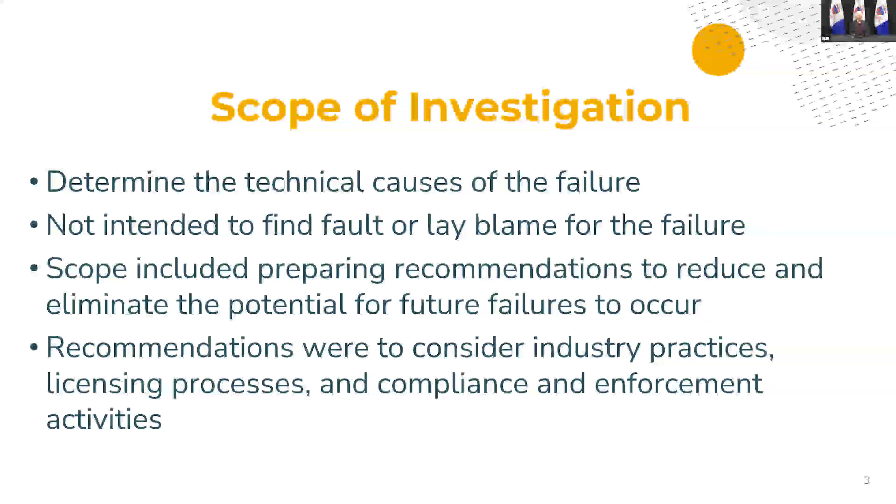So the investigative report was very hands-on. We started with a site visit, and I actually went to the site before the IRB was formed, and then most of the rest of the members went in the middle of September sometime. We had quite a bit of interaction with the library of documents held in the public record, as well as held by Victoria Gold Corp.

There was a lot of back and forth with the receiver, and the receiver manages, I'm not sure if manage is the right word, but they control the operations of Victoria Gold now, and there was a lot of interaction one-on-one with current Victoria Gold people, in part in finding the right kinds of documents. The operation's been around for a number of years, and so there's a mountain of documents, so going through those and finding the right ones to look at took some real effort on everybody's part.

We also had some meetings with the geotechnical engineers that are currently working on the project, both for the Yukon government and for the receiver as part of the remediation. And we had interviews with both current and former VGC employees. Next slide.

We also, through the receiver and through VGC current employees, obtained samples of different ore types, including the ore that we ultimately believe is at the root of the failure. We also got liner samples to test the liner behavior, especially after some of it had been exposed to the weather. We engaged our own independent engineering companies to work for us. They were contracted through the receiver, but they worked exclusively at our direction, so we had technical control over their work. And you'll see their work product throughout our report and predominantly in the appendices.

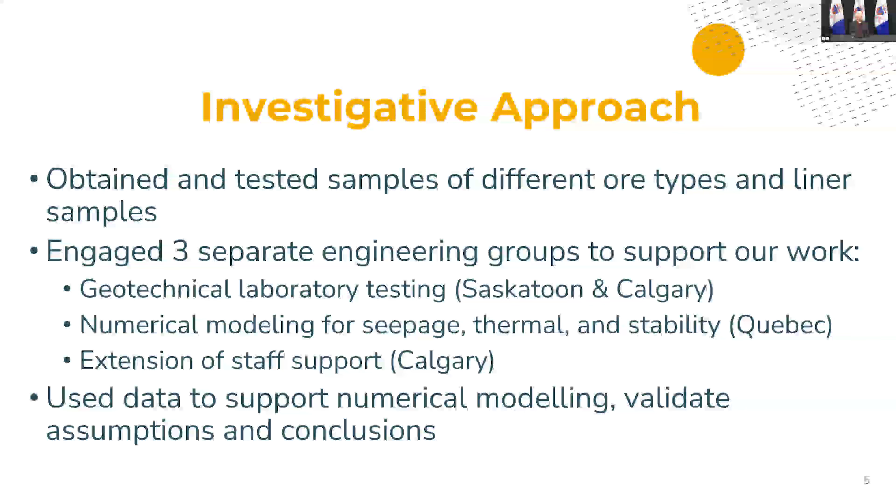The study started pretty early, though, in understanding the specific nature of this failure. This is unquestionably a liquefaction flow slide. It's a word I should know how to say since I've written it so many times. Liquefaction is a very specific set of geomechanical and hydrogeologic behaviors that have a history of causing the most catastrophic failures in all of geotechnical engineering, and mass landslides is one of the most common outcomes of that. There's some amazing building failures that have happened because of this as well.

And that this was a liquefaction was quite clear from day one, from when I flew over the site in a helicopter in early July. It was crystal clear that was the mode of failure. That was the unanimous conclusion of the 6 of us from the very early days. So we never had to really ponder whether that was the failure or not. Now, that was important in part because liquefaction has very specific requirements to occur. And those are 2 pre-existing conditions that we call contractive material, in this case, crushed ore, and saturated conditions.

In addition to those 2 conditions having to exist, you need a trigger mechanism. All heap leach facilities have some contractive ore in them, and all heap leach facilities have some saturated ore in them. So that those 2 conditions likely existed in the heap was pretty clear. We did verify that beyond any doubt. In fact, we know with some specificity where those occurred in the heap.

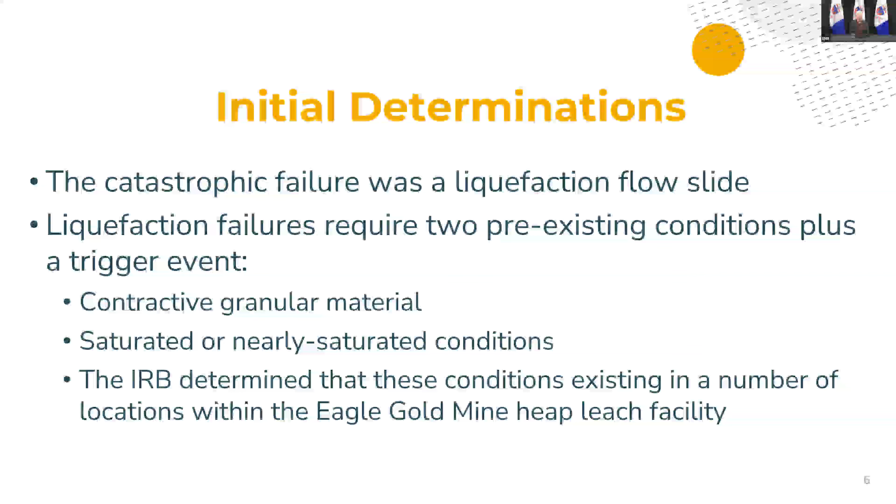So the third thing you need for liquefaction is a trigger. So our search early on focused on finding the trigger event. Next slide. The most common trigger for liquefaction failures, and the ones that tend to make the press and textbooks, are earthquake-induced liquefaction. We were able to rule out earthquakes early on because the seismic record for this part of the world is quite thorough, and there was no earthquake activity anywhere near the right timing or the right location to trigger this event. That parallels the study by another group who came to exactly the same conclusion.

So that allowed us to focus on what's called static liquefaction, and that's loading by anything other than earthquake in essence. It's a little more complicated than that, but that's what it boils down to. The classic loading for static liquefaction is rapidly raising the elevation of something, like in this case, the heap. We actually see that fairly commonly in tailings dam failures for a certain class of tailings dam construction. The 2 big failures that happened in Brazil both had static liquefaction at their root, because you raise the dam too fast, or you change the water level behind the dam too fast. So in this case, we looked at the rate of the rise of the heap, and we ruled that out. It was too slow and too far away to be a plausible trigger.

The next most common trigger is unloading the toe or some part of the lower slope. And you see that on highway slopes occasionally where some construction activity will undermine the slope, and then next day that slope will release and have buried the road. That's a local static liquefaction caused by undermining the toe of the slope. So we looked at that as well. And then we also looked at the water levels inside the heap. Now this heap had very little monitoring data, so we didn't have direct readings of monitoring wells and piezometers, so we had to look at indirect evidence. And I'll talk a little bit about that in a minute.

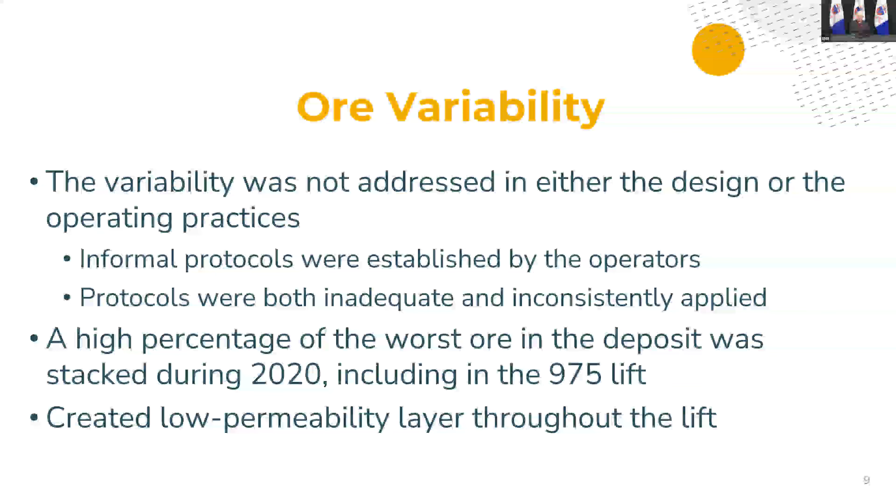And the 975 lift you'll see as a star in our report, because that lift was stacked with 76% of this poor quality material, which the operators called shear zone material. And so we adopted that in the report. That material is very low permeability and very weak.

Next slide. So the second part of the equation, though, is we need water to saturate that zone. So we need to have contractive ore, and in this case, we had a variety of different kinds of ore that could cause problems, and then we needed a water source.

Between the bottom of the heap and the liner system is a 600 millimeter thick gravel layer with embedded perforated pipes. That's called the pregnant leach solution collection system, or the PLS collection system. And the intent of that is to collect all the water percolating through the heap, which is now gold bearing, and carry it inside that 600 millimeter gravel layer and transmit it down to the in-heap pond at the very toe of the heap.

We knew that there were some issues around how well that worked because of some historic seepage around the side of the heap. That might be my next slide. Let's see. Nope. Okay, we'll leave that there anyway. So I'll have a slide where I'll show you some of the visual evidence of that.

But we knew that system didn't work perfectly, in part because of the history of seepage, in part because of some of the aerial photos or drone photos we saw, some evidence of dislocated pipes. The quality of that gravel for us raised some suspicions early on.

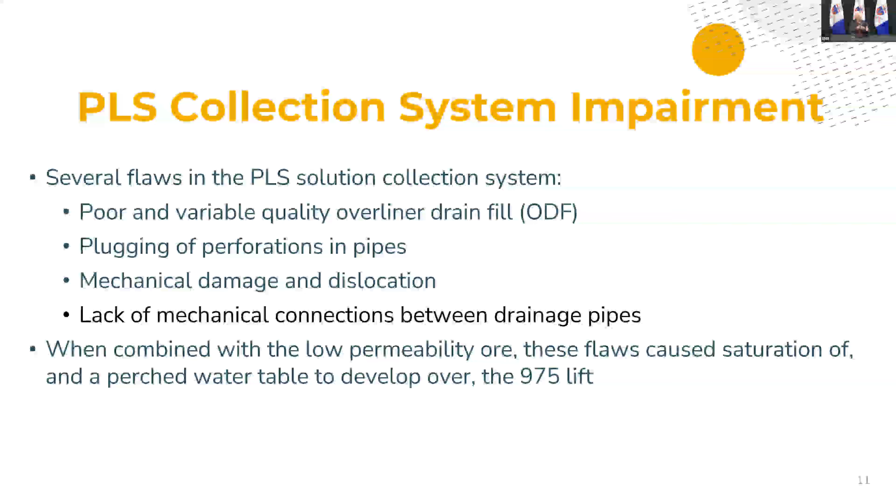So we looked at those two as probably being pretty common across the facility. And let's go to the next slide. So that's the ODF in contact with the perforated pipe. And the corrugations in the pipe actually act to let more sand in and keep some of the gravel out.

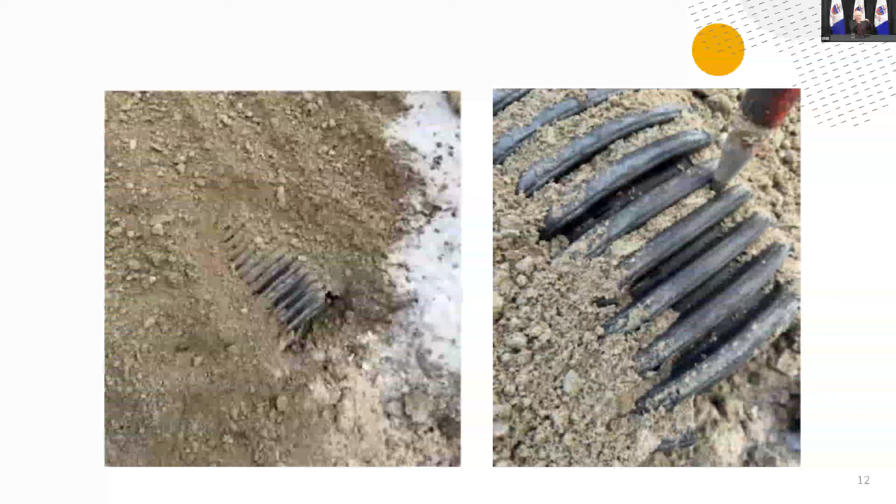So the material that actually touches the perforations, if you squint your eyes, you can see the little slotted perforations at the bottom of the corrugation. So what's in contact with that is almost entirely sand. None of that gravel matrix that you'd like to see to help spread the flow around. So we think that caused solution to pool over the pipes wherever it had to flow in concentrated flows.

That's going to cause the water depth to have to be deeper at that joint. But what they actually built was even a little less desirable, where they don't even have the overlap. They just butted the pipe up against. So we calculated the head loss, or head loss in pipes looks like deeper water. So we calculated the head loss at that non-mechanical connection to be between 2 and 5 meters.

So the water would have gone from something like 600 millimeters or less to several meters at every joint. Then it would kind of stair step as it goes down the hill towards the in-heap pond. And that depth is related to the sandy ODF. If you had really coarse gravel, it wouldn't be as high, but you'd still be more than 600 millimeters.

So those come together. And the reason this is important is this is a quirk of a valley fill leach pad, where the slopes in the heap are quite steep. And I'll get a cross section later, and I'll show you this. But in concept, each lift of ore comes all the way back and touches the top of the gravel layer until you get to some elevation much higher than this.

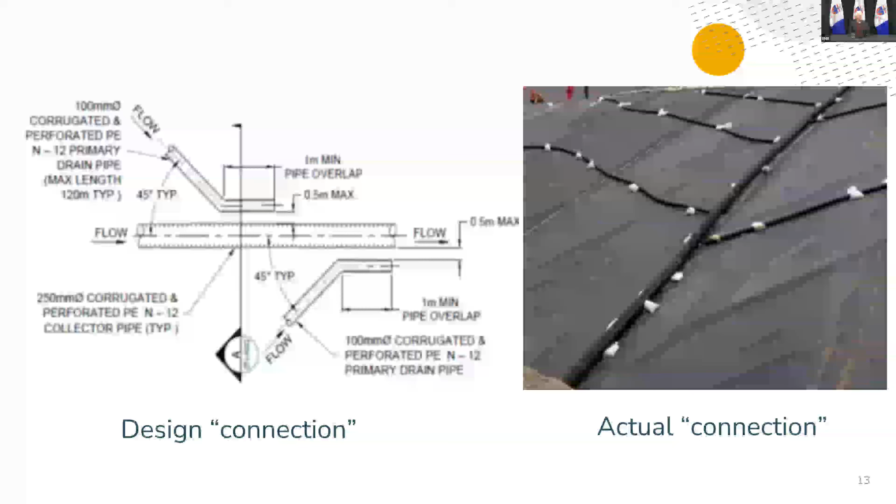And we know that happened because that line of seepage that we mark as the bottom of the 985 and the top of this 975 lift, those first seeps manifested in January 2021. That lift was stacked in the summer of 2020, and the first lift of ore placed over it and irrigated in the fall of 2020. So by January 2021, you had open flow coming out of the side of that heap, and open flow in the Yukon, I don't have to tell any of you what that means, it was non-trivial flow.

And then that line of seepage expanded over the years to be a little more than half the width of the slope in that zone. There's also a little bit of seepage over to the right, up on the 995 lift, and then down around the 965 lift. That seems to have been much more localized.

We know that this poor quality material came out on a regular basis, and it wasn't always well managed or well blended with the good ore. They had a protocol to blend it, but it was loosely enforced, and the protocol itself was not adequate. So we know that there's some other areas of low permeability in the heap, but none as concentrated as the 975 lift. So that's how we know the water spilled out, because you can't get water to the face of the heap unless it's got a low permeability layer and water's on top of the low permeability layer.

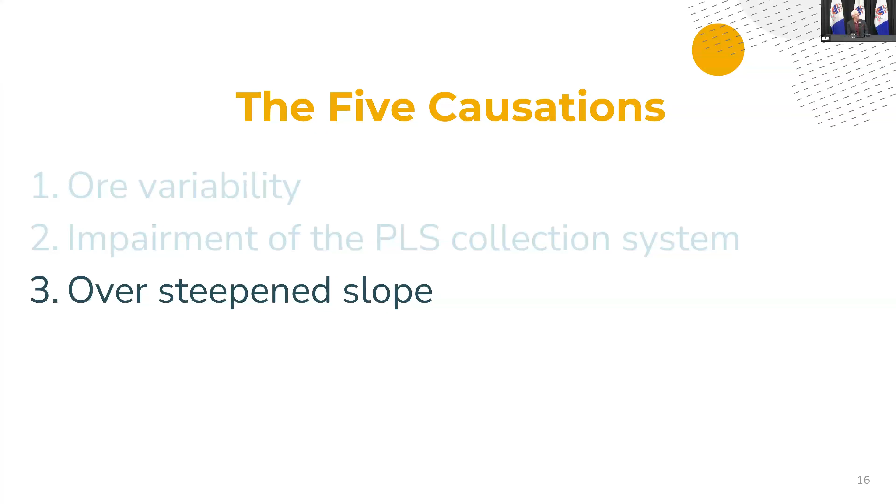I don't have a pointer, do I? Can I walk up and point? It won't be on the video. Oh, well. I'm very visual.

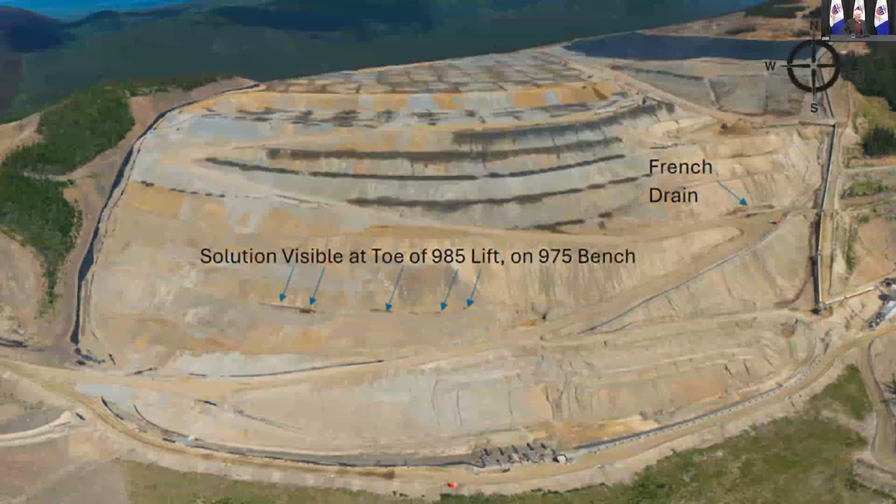Visualize the area on this, and I'll show you a cross-section of that. Interrupt the web version of this. Oh, well, my apologies. So now we can go back to that. There we go. Go to the next slide, please.

So the original design was 2.5 to 1. The original engineer changed that to 2.8 to 1 in 2019. It's not clear why. They said they wanted a higher factor of safety, but the factors of safety by their analysis were pretty good anyway, so I'm not quite sure where that change came from. But for this section of that slope, it's roughly twice as steep as the design. It's 1.4 to 1 instead of 2.8 to 1. Next slide.

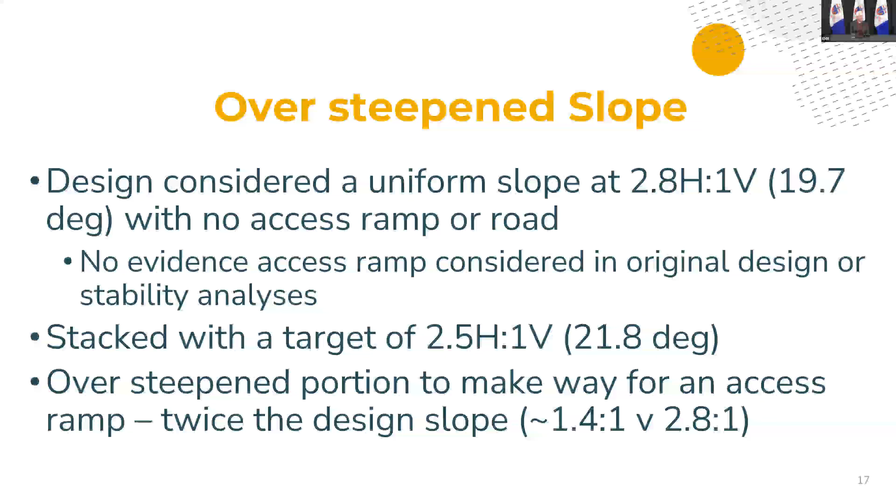I believe the reason they did that is there's no evidence the original design considered a road up that slope. And as you saw in the picture, there is a road that zigzags. When you put a road on a slope, you either have to push the slope further back or you have to have a steeper part. If you push the slope further back, you have less capacity to stack ore on the heap. So I'm assuming that they decided to do the oversteepened slope to preserve that original crest location design.

So they wound up with a 45-meter high section of ore stacked at the angle of repose, which means it had a factor of safety very close to 1. That on its own is fairly common in mining, and the price they pay is some cleanup costs; you get veneer failures, you might get a road blockage that you have to clean up. And if that was the only issue, it would have never made the press. It would have been occasional maintenance issues, and they may have gone back at some point and buttressed that slope with rock or something.

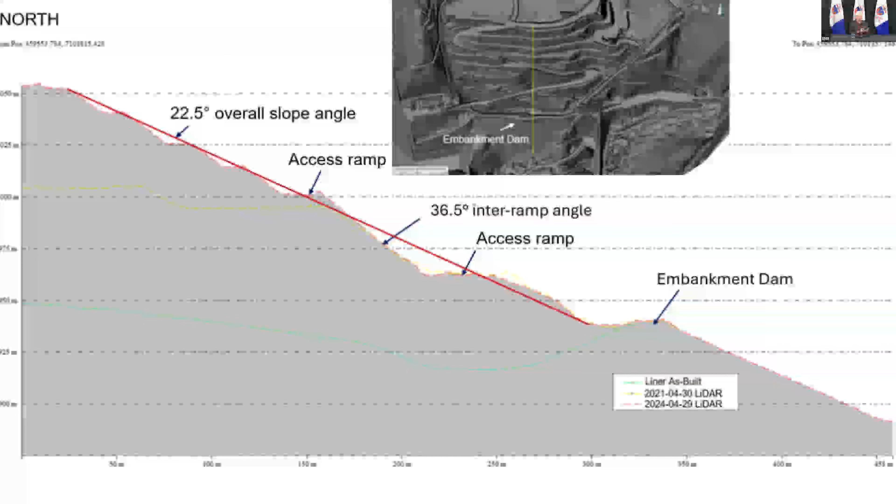And also, I talked about this too briefly. The 3 lifts stacked in 2020 were the 965, the 975, and the 985. Those all contained about 2/3 or more shear zone material. Those are all bad quality ore that shouldn't have been stacked there. Those dominate the lower half of that oversteepened section. So they're low strength and they're wet. So this caused a low factor of safety right in the middle of the highest slope on the heap because of steeper slope, low permeability ore, and water flowing on top of that ore. So let's go to the next slide.

So until that point, what we have is a condition that's quasi-stable, a low factor of safety, but nothing bad's happened yet. So we spent a lot of time trying to answer the question, why did this fail on June 24th, 2024? We had low factors of safety, but they weren't below 1. What changed? What changed in April 2024 is they began irrigating the south slope of the heap.

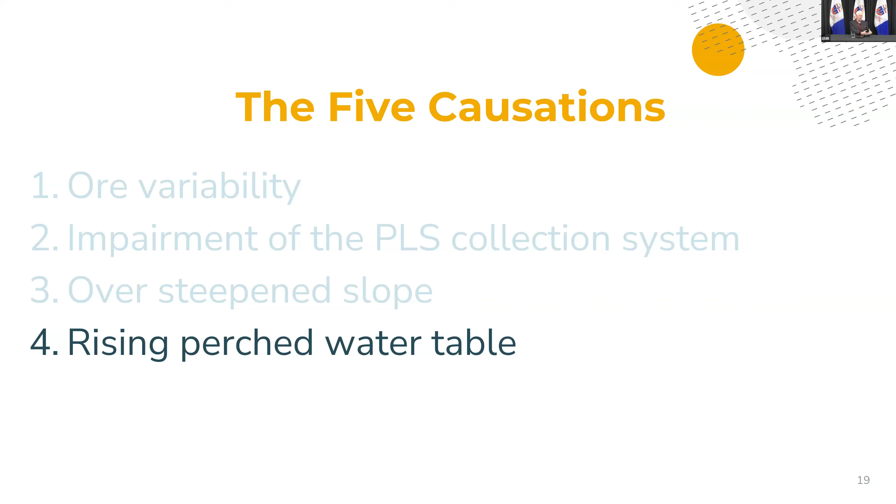Now, in the prior 2 or 3 years, they irrigated that south slope a little bit. In 2022, they irrigated 1 bench. In 2023, they irrigated 3 benches. In 2024, they irrigated 5 benches on that slope. And they put about twice as much water on that slope in 2024 as they did in any year prior to that. The total flow to the heap was about the same, but it was disproportionately loaded towards the slope and on the slope. Let's go to the next slide.

3 of those 5 lifts were directly over the top of the 975 lift, which means that water had no chance to go into the PLS collection system. It landed on top of the 975. The lifts further up the slope flowed down to the PLS collection system, and because that system spread out over a long area, those benches may have had no impact at all on the water level. But 3 benches were right on the 975, and that water had nowhere else to go.

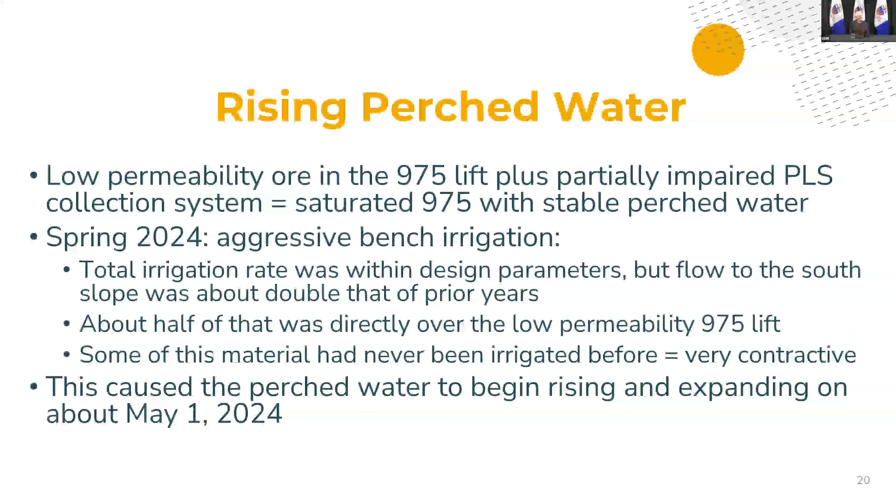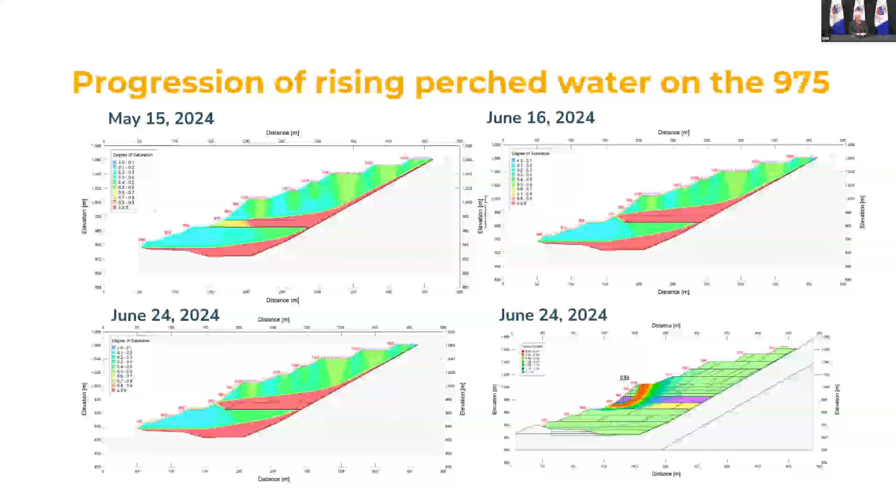Go back to the next slide. Now, I can't see that far. Now I have to walk, sorry.

At a factor of safety of about 1.1, slopes start to move enough that you can measure them and sometimes enough that you can see them. So probably around June 1st, there would have been some evidence of distress on that slope, but there's no operators down there. This is not an area where people were going routinely, and there'd be no reason for an operator to be down there, and there was no instrumentation on the slope, so they didn't know this was happening, but there would have been some evidence.

Some people postulated in the early days that a pipe broke 5 minutes before the failure, and that that caused the failure. We investigated that, and there is essentially no chance that that's what happened. We think the pipe failed because the slope was moving enough to break the pipe, and that's completely consistent with that graph and this theory.

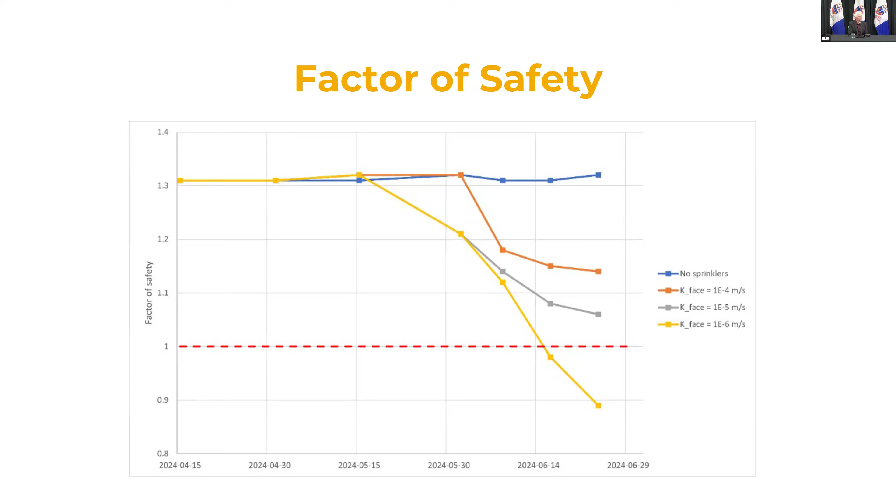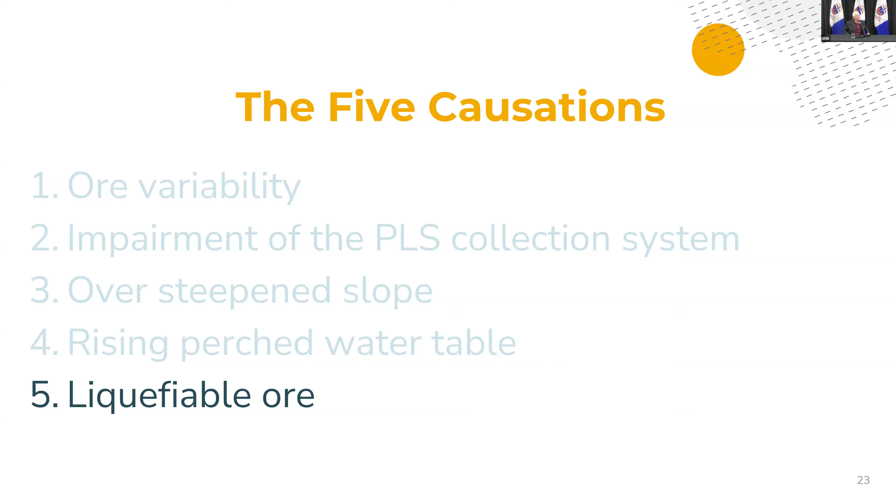Go forward again, please. So that leads us to the liquefiable ore. This slope failure, we have essentially 100% confidence that this is what happened. There's physical evidence in that the photos of the slope before and after the failure match almost precisely what our numerical modeling says the slope looked like and where it triggered. Within meters, we have the toe and the crest of those failures showing up in the photographs. So we know that happened. What happened after that is chaotic. Go to the next slide, please.

So liquefaction is this sudden loss of strength because you're causing saturated contractive ore to contract. The water pressure skyrockets, and as it skyrockets, the properties of the material change. The shear strength, which holds everything up, collapses. In this case, we know from testing and modeling that the shear strength went down by a factor of about 4 during this process of contracting.

So the original design engineers used a friction angle of 38 in their stability modeling. In this period, and this period is very short, and I'll give you a timeline in a moment, the friction angle went from 38 degrees to the development of pore pressure where it went down to about 17 degrees. And then as the pore pressure brought the factor of safety below 1, it then mobilized what we call residual strength. And that's like friction.

It takes more effort to get the pool table to move than to keep the pool table moving. It's exactly the same in soil mechanics. And so it went from 38 degrees to 17 degrees to 10 degrees. And in shear strength parameters, that's a little bit more than a 4-fold reduction in the strength. And that's what liquefaction is.

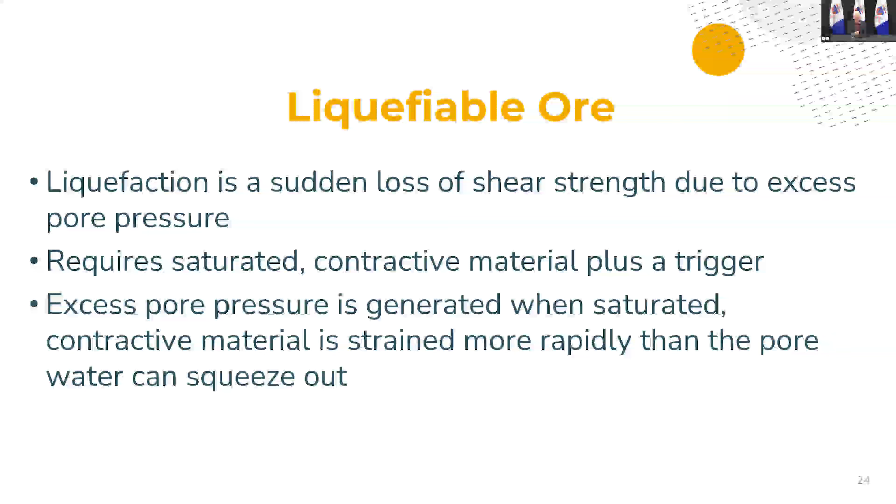Next slide. So the inter-ramp failure was triggered by the rising perched water level caused by the heavy irrigation in 2024 of those benches. As that material started to slide, it caused the ore behind it to start to relax. Unloading a slope is a classic trigger for liquefaction. So the material behind it started to slip and then liquefy. The material to the east started to slip and liquefy because the first block moved southwest. We know that definitively, again, from the photo evidence, but also from the survey data.

And as it moved southwest, we left that fairly steep scarp that everybody sees in the pictures. That's the upper scarp or the eastern scarp. That area in there has classic signs of very local liquefaction. And this whole mass, which has gone from 300,000 tons to several million tons, moved about 100 meters south and about 40 meters vertically down. That then compressed the ore in the in-heap pond, and the entire mass in the in-heap pond liquefied.

And that's what was squeezed out over the top of the dam, as I was reminded this morning, like a toothpaste tube. And that's what caused the final failure at the very top, which is just slumping of the slope as everything kind of fell out from under it. So there's 4 stages, but it's that liquefaction failure where nominally 2 million tons of liquefied ore was pushed out over the top of the dam and flowed down Ann Gulch into Dublin Gulch.

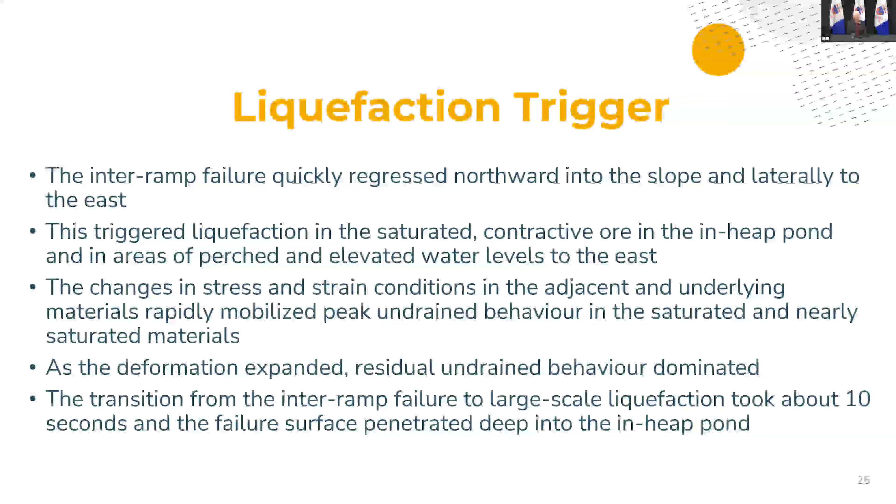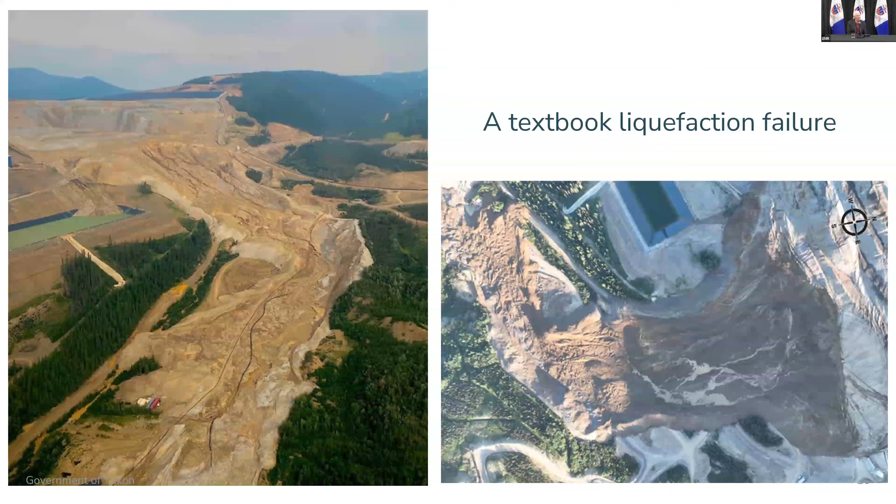I'm sure you've seen pictures like this, but these are textbook liquefaction failures. These pictures or pictures like them will wind up in textbooks and professional papers about liquefaction and heap leaching. Next slide.

So, how do we prevent this from happening again? I think this is by far the most important part of the work we did over the last year. We came up with 50 recommendations that took us months to vet amongst all of us. These speak to industry practices and licensing and regulatory practices. They also speak to the mine waste guidelines, which are part of the licensing practice.

We've made recommendations that you can divide into governance, risk management, and prescriptive requirements. We don't present them that way because I think they're more digestible to talk about industry practices and regulatory practices. But I tend to avoid prescriptive requirements because I think most of our benefit comes from the other two categories. But in this case, there needed to be some prescriptive standards.

I think there needs to be, in part because of things that weren't done here that are, in hindsight, a little surprising. So we have some prescriptive standards, but the recommendations dominantly are non-prescriptive. More risk management, more governance, more procedures, more policies, one of which is review boards. We know review boards work from the tailings industry, and that's one of our most important recommendations.

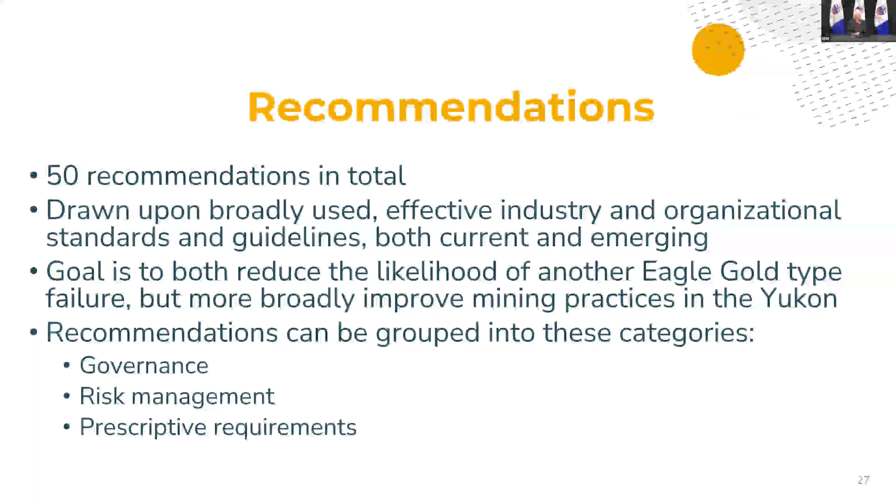Next slide. So just kind of a sampling of the kinds of recommendations in there in terms of conceptually the things we're covering. And we have independent review boards on there. More robustness in the design, more robustness in surveillance. This site had almost no surveillance, so we think the bar should be vastly higher than this site. But honestly, the practice in the industry isn't high enough.

I've had this conversation with a number of other companies in the business before this failure. We need better surveillance of these facilities across the board. The project that failed in Turkey early last year had surveillance. Had they followed their own guidelines, they wouldn't have prevented the failure, but they would have prevented any serious injuries. So surveillance works. Next slide.

We did not do a deep dive into the licensing practices here since we don't find any direct linkage between licensing and these failures. But we did recommend a number of licensing improvements that we see elsewhere that are successful. So these flow from practices in other jurisdictions, practices that have come out of a number of industry organizations that we know are successful. So these are not hypothetical recommendations, these are tested recommendations. A lot of them come from the tailings industry, which has had a vastly worse time than heap leaching, so they've learned their lessons earlier than heap leaching. So, next slide.